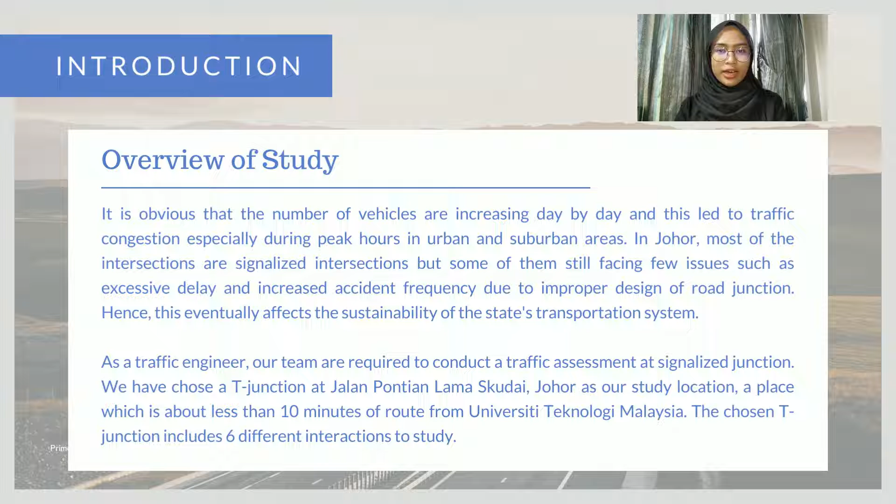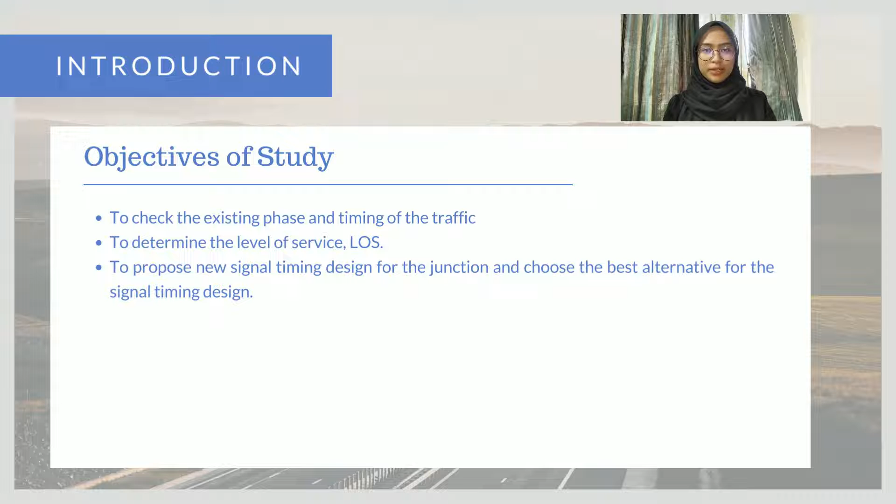As a traffic engineer, our team is required to conduct a traffic assessment at a signalized junction. We have chosen a T-junction at Jalan Pontian Lama, Skudai, Johor as our study location. The chosen T-junction includes 6 different interactions to study. The objective is to check the existing phase and timing of the traffic to determine the level of service (LOS), and to propose a new signal timing design for the junction, choosing the best alternative.

Upon completing the study, we realized it is important to know traffic design because we can identify the traffic level of service through calculation and theoretical analysis. Then we can recommend relevant approaches to improve the traffic at our study location at Jalan Pontian Lama, Skudai, Johor.

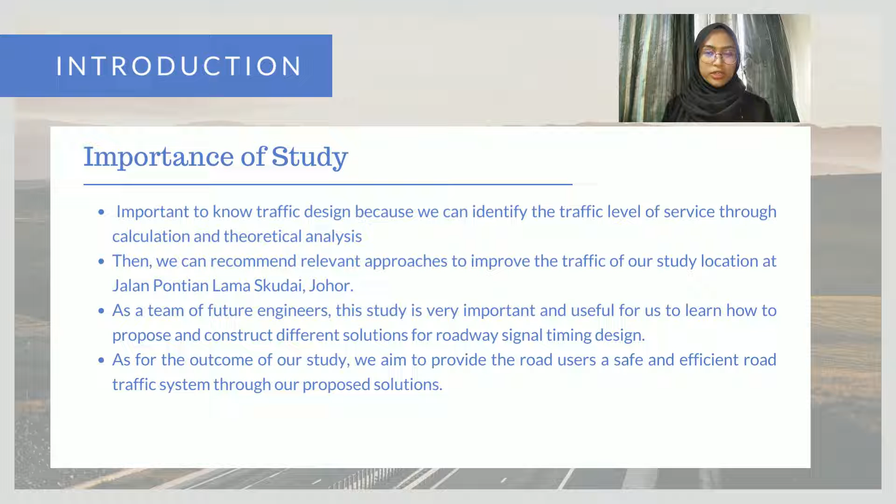As a team of future engineers, this study is very important and useful for us to learn how to propose and construct different solutions for roadway signal timing design. As for the outcome of our study, we aim to provide road users with a safe and efficient road traffic system through our proposed solutions.

First, we will do a topic study and distribution of work. Secondly, we will pick a site and survey it to check if it's suitable. Then, data will be collected at the site that has been picked. Next, the collected data will be calculated, and we will design alternatives based on the calculations obtained.

If it's okay, we will choose the best system with a completed cycle time setting. If it's not okay, we will redesign a new alternative with suitable total saturation flow. Lastly, we will conclude at the end along with relevant data collections.

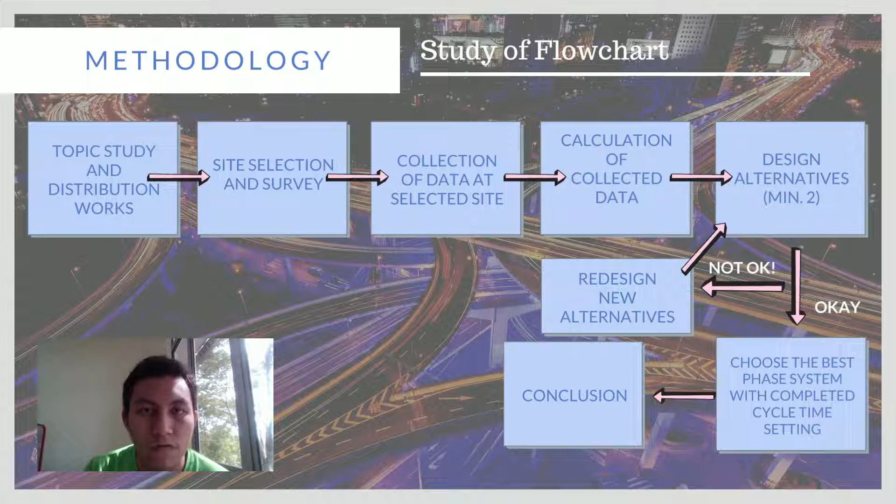In order to analyze the selected site, some data needs to be collected for the existing geometric design. For instance, the number of lanes from each direction is important, together with the width of the lanes. The cycle time for each signal indication of a lane is needed to identify the period required to complete the sequence of 3 phases at the T-junction.

The traffic signal system is determined by recording the complete cycle time of the traffic 3 times, and the average cycle time was calculated. The sign of each lane is recorded to determine the service given to road users. Besides, the most important data needed to analyze the signalized system at the chosen site is the traffic volume from every direction at different phases for an hour.

Hence, we choose to do it during the peak hour of the weekday period, around 9 a.m., because most people are still on their way to work. Data such as turning radius and gradient of the road could be roughly assumed.

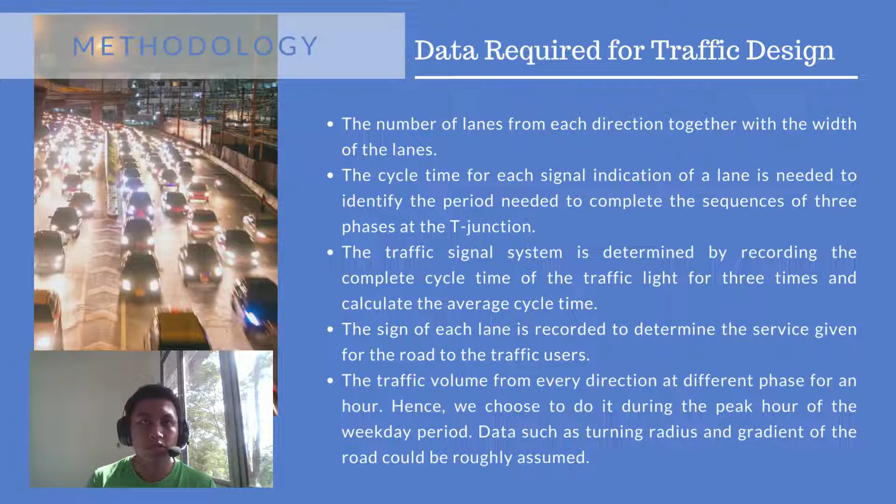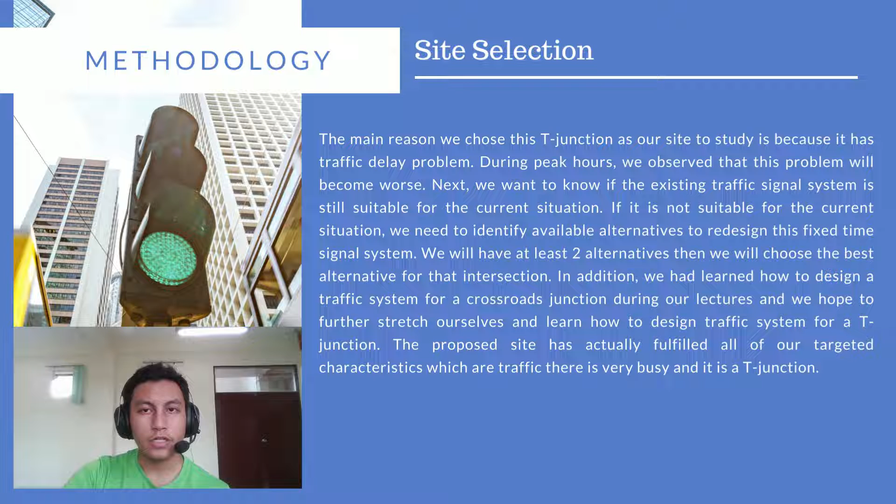The main reason we chose this T-junction as our study site is because it has a back traffic delay problem. We observed that the condition is even more severe during peak hours. Hence, we need to create a few alternatives that redesign the fixed time signal system and choose the best value, which is the lowest. The objective in geometric design is to optimize efficiency and safety while minimizing cost and environmental damage.

Due to the restriction that we had, Google Street View will be used to analyze the road width distance. After that, we will use traffic volume count as part of transportation surveys. In our group, we will be recording the number of vehicles passing on a predetermined location using a vehicle tally sheet.

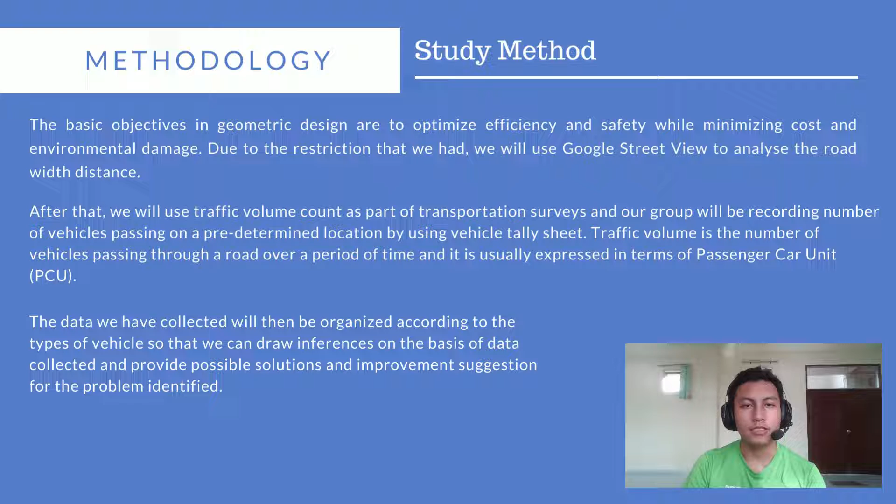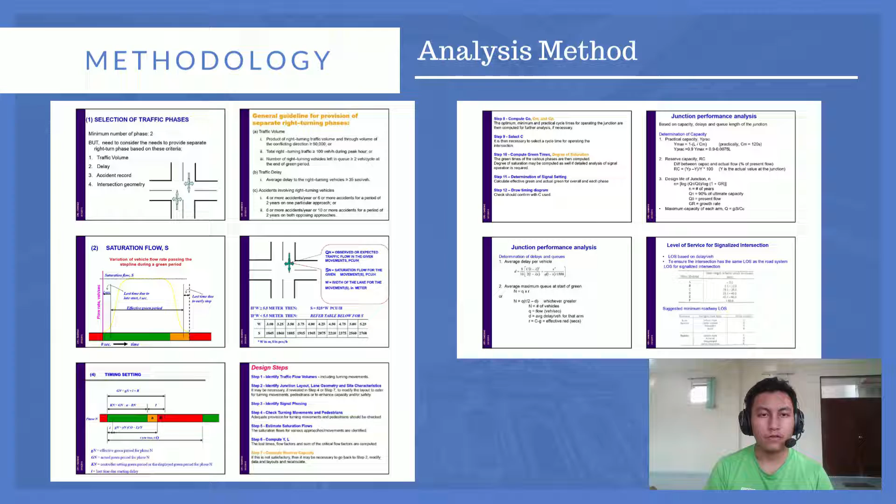Traffic volume is the number of vehicles passing through a road over a period of time, usually expressed in terms of passenger car unit or PCU. The data we collected will be organized according to the types of vehicle so we can draw inferences from the data and provide possible solutions and improvement suggestions for the problem identified. This is the analysis method we obtained from traffic engineering notes by Che Ros Ismail and also JKR Arahan Teknik Jalan 11/87 from 1987.

Then we check the total volume in the straight and right turning phase. In phase 1, there is a conflict between south to east and east to west, which gives 24,857, less than 50,000 volume, so it is adequate. But for the turning volume it is 371, which is greater than 100, so it is not adequate.

Same goes for phase 2. The conflict is between east to south and east to west, which gives 10,586, less than 50,000, so it is also accepted. But for the turning volume it is 158, which is greater than 100 and is not adequate. For phase 3, there is no conflict.

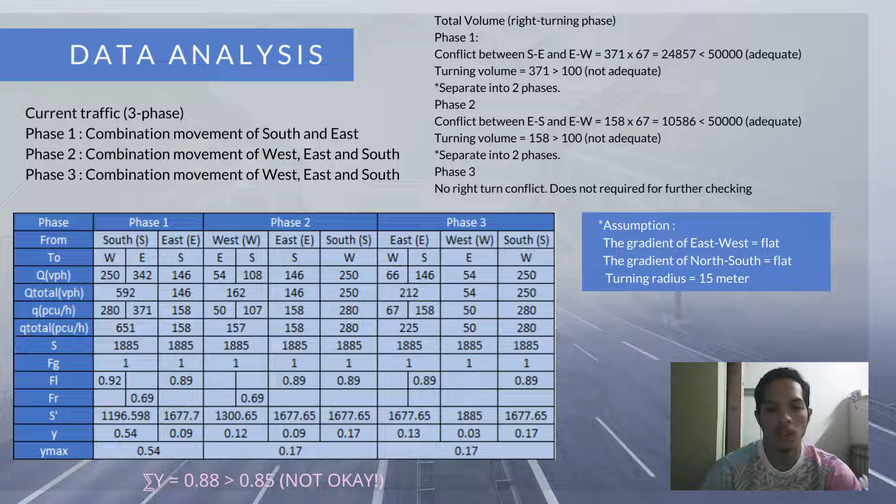From the calculation in the table, the maximum saturation flow we get for phase 1 is 0.54, for phase 2 is 0.17, and for phase 3 is 0.17. We sum up all the values and get 0.88, which is greater than 0.85, so the value is not accepted. Since the saturation flow is too high, we need to redesign the traffic flow by coming up with a few alternatives.

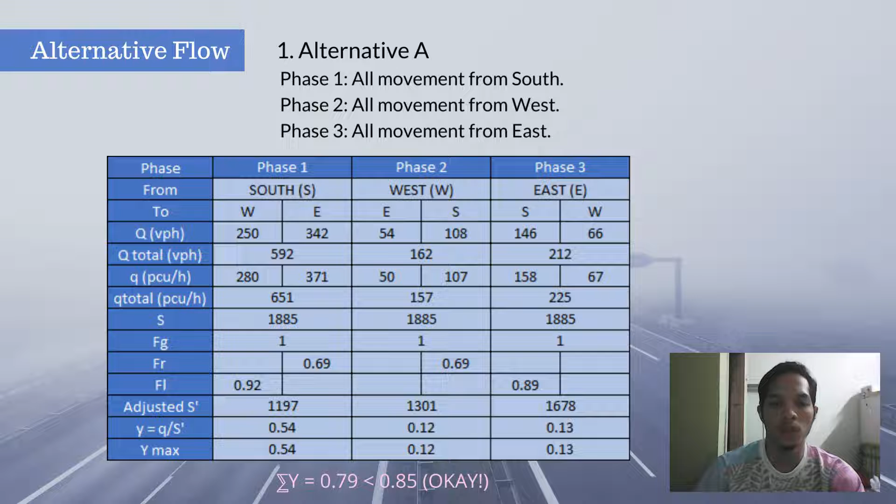For the first alternative, alternative A, we assume there are three phases at the traffic. Phase 1 is all movement from south, phase 2 is all movement from west, and phase 3 is all movement from east. From the calculation in the table, the maximum saturation flow is 0.54 for phase 1, 0.12 for phase 2, and 0.13 for phase 3. We sum up all the values and get 0.79, which is less than 0.85, so the value is accepted. So the traffic flow here is accepted.

Now we're going to look at alternative B. For alternative B, we design it to have three phases. Phase 1 has all movement from south, phase 2 has all movement from west to east and east to south, and phase 3 has all movement from west and south to west.

Now we're going to look at the table we use to calculate the maximum Y value. As you can see in the table, we take the Q, or flow value, in vehicles per hour from the data we obtained at the targeted area. After all the calculation, we obtain the maximum Y for phase 1 as 0.54, for phase 2 as 0.16, and for phase 3 as 0.17. After that, we sum all the maximum Y values: 0.54 plus 0.16 plus 0.17, giving us 0.87, which exceeds the 0.85 limit, so this is not adequate to be implemented in the targeted area.

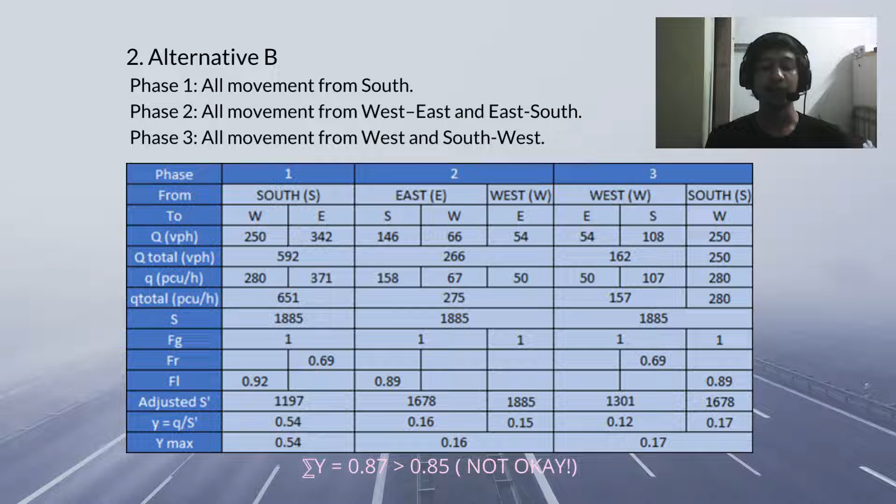And now we are going to look at the last alternative that we propose, which is alternative C. For alternative C, we will design it to have three phases. For the first phase, we have all movement from south and east to south. For phase 2, we have all movement from west. And for phase 3, we have all movement from east and west to east.

Now we're going to look at the table we use to calculate the maximum Y value, same as the previous alternative. We take the Q, or flow value in vehicle per hour, from the data we collected at the site. After all the calculation, we obtain the maximum Y value for each phase: for phase 1 is 0.54, for phase 2 is 0.12, and for phase 3 is 0.13. After that, we do summation for all the maximum Y values, 0.54 plus 0.12 plus 0.13, and we obtain 0.79.

And it does not exceed the 0.85 limit, and this is adequate to be implemented in the targeted area.

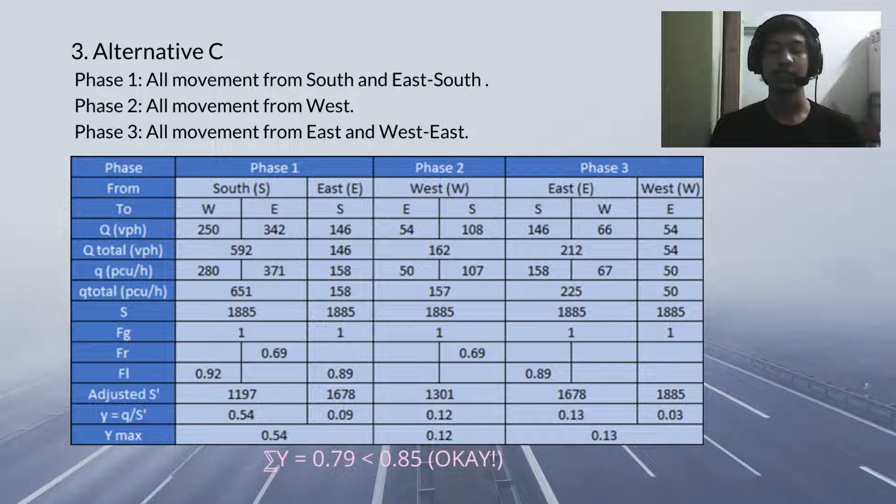Now I will be talking about the optimum cycle calculation. We have made some assumptions: the all red period equals 2 seconds, amber 3 seconds, and lost time due to late start 2 seconds. We calculate the intergreen period using the formula I equals R plus A, and we got 5 seconds. Then the total lost time per cycle, we got 12 seconds.

Lastly, we calculate the optimum cycle time using the formula 1.5L plus 5 over 1 minus Y, and we got 110 seconds.

By calculating the minimum and maximum of Co, the minimum 0.75 Co we got 83 seconds, and 1.5 Co we got 165 seconds. Our group agreed to take the value of optimum cycle of 125 seconds.

Next, we calculate the effective green period Gn with the formula Gn equals Y max times our optimum cycle time minus 12, which is the total lost time per cycle, over 0.79, our total maximum saturation flow. And we got the answer of G1, G2, G3, which are 77, 17, and 19 seconds respectively.

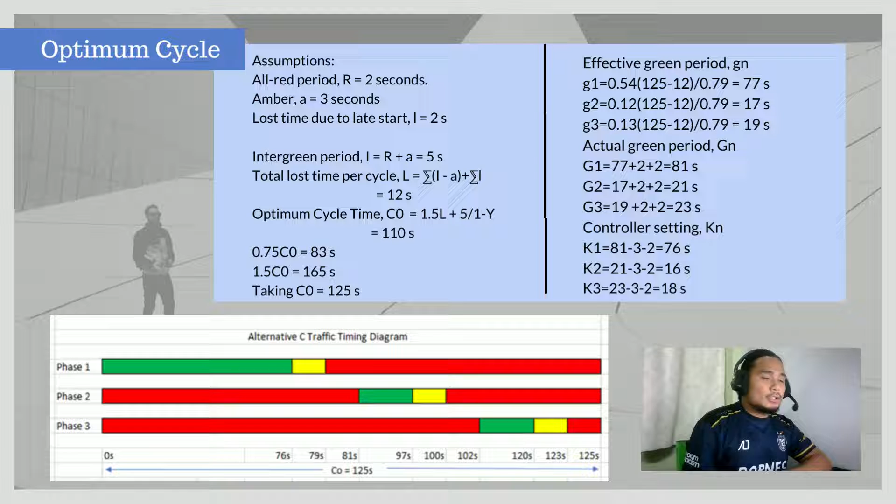Now we have calculated the level of service for alternative C, and this is what we got. First, we calculated for all the movements on phase 1, phase 2, and phase 3. On the phase 1 movements, south to west, south to east, and east to south, we got all three movements level of service B.

While the phase 2 movements, west to east and west to south, and also phase 3, east to south, east to west, and west to east, we got all five movements on phase 2 and phase 3 level of service E. Thank you.

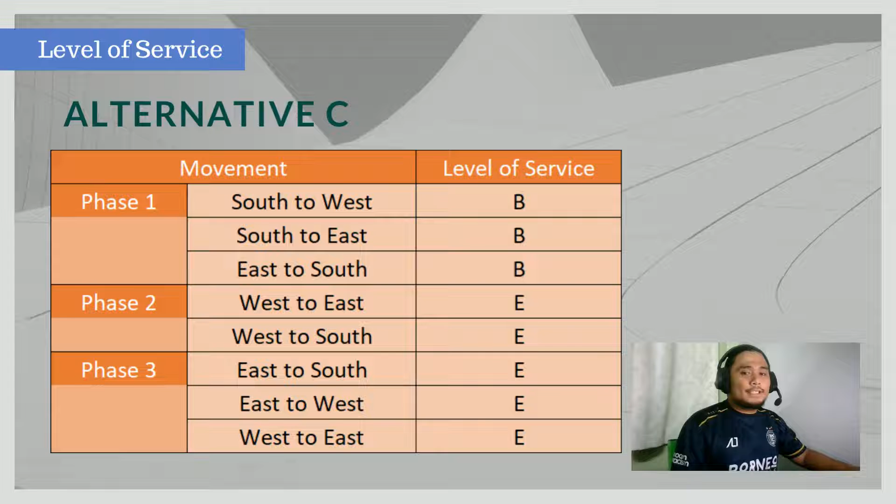In conclusion, as this three-arm signalized intersection at Jalan Pontian Lama has two lanes on all approaches, we choose a three-phase system, which is the most suitable system for this type of junction. Comparing the current traffic timing, the value is slightly higher, 0.88, greater than 0.85, where we need another alternative for the traffic junction. The most suitable alternative is alternative C compared to the other two alternatives, A and B.

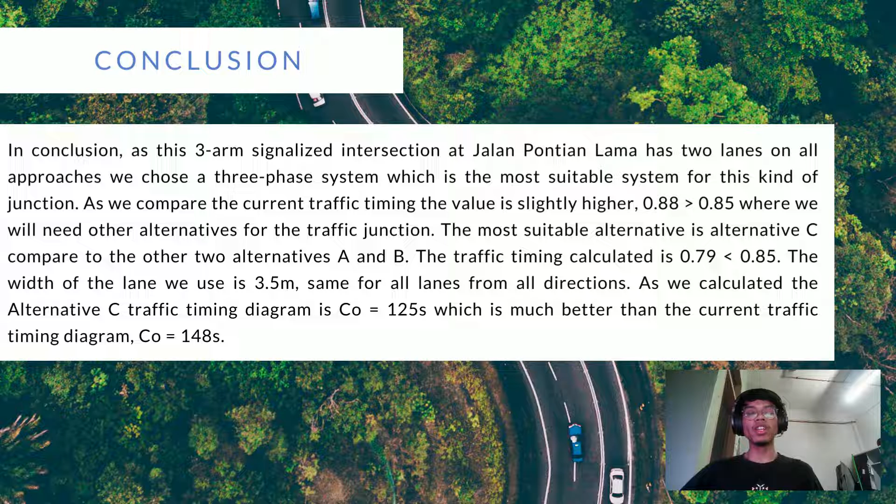The traffic timing calculated is 0.79, less than 0.85. The width of the lane we use is 3.5 meters, same for all lanes from all directions. As calculated, the alternative C traffic timing diagram has C naught equal to 125 seconds, which is much better and lesser time than the current traffic timing diagram of C naught equal to 148 seconds.